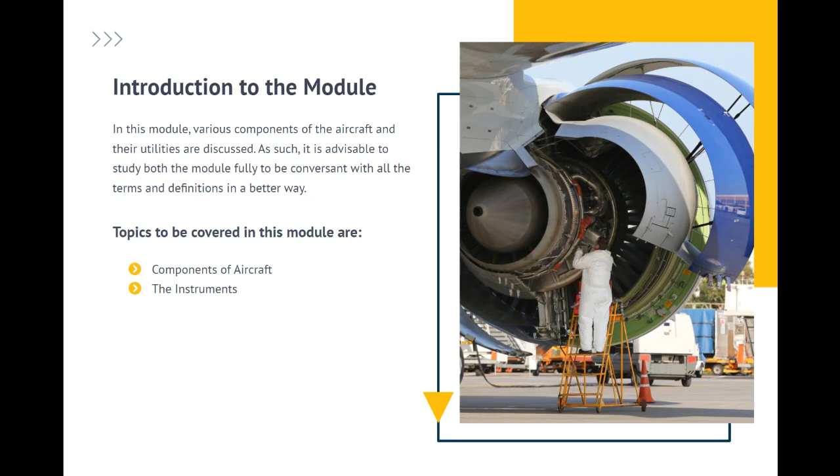Topics to be covered in this module are: components of aircraft, the instruments,

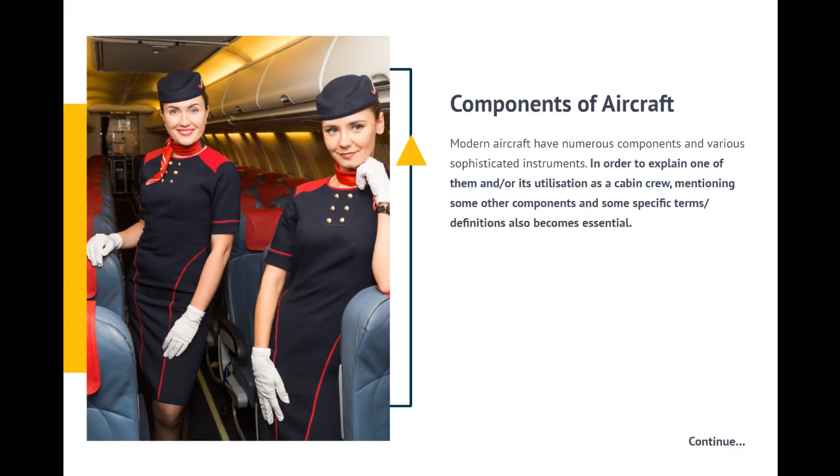Components of aircraft. Modern aircraft have numerous components and various sophisticated instruments. In order to explain one of them, and/or its utilization as a cabin crew, mentioning some other components and some specific terms or definitions also becomes essential. Some of the basic and important ones are cited and discussed below.

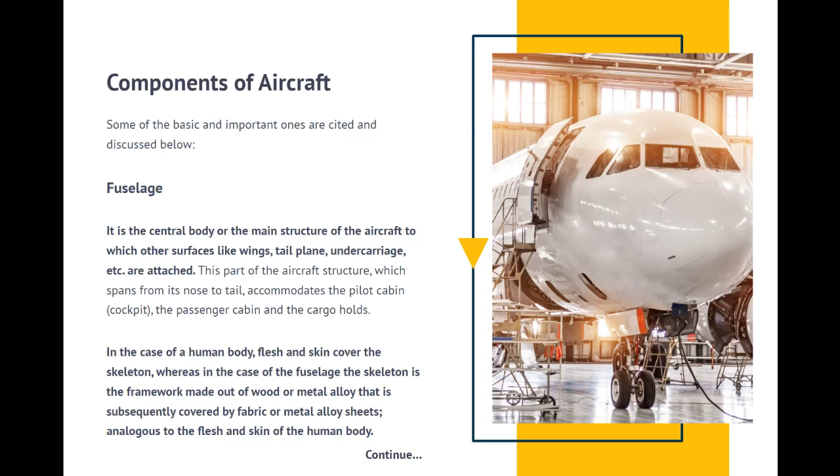In the case of a human body, flesh and skin cover the skeleton, whereas in the case of the fuselage, the skeleton is the framework made out of wood or metal alloy that is subsequently covered by fabric or metal alloy sheets, analogous to the flesh and skin of the human body.

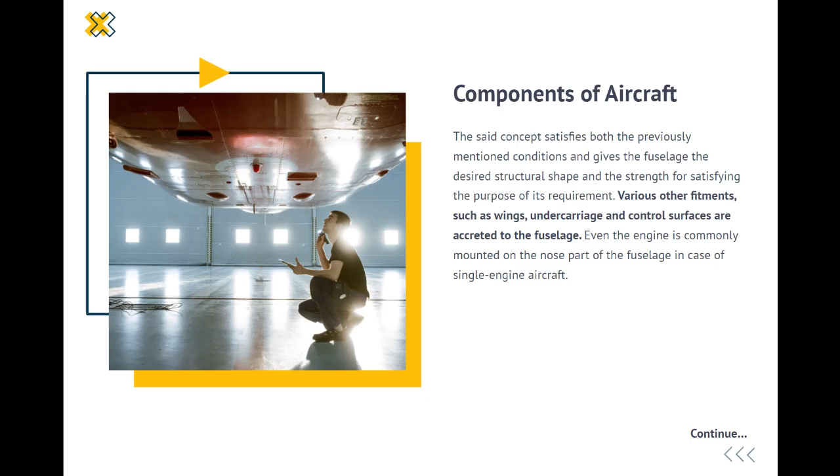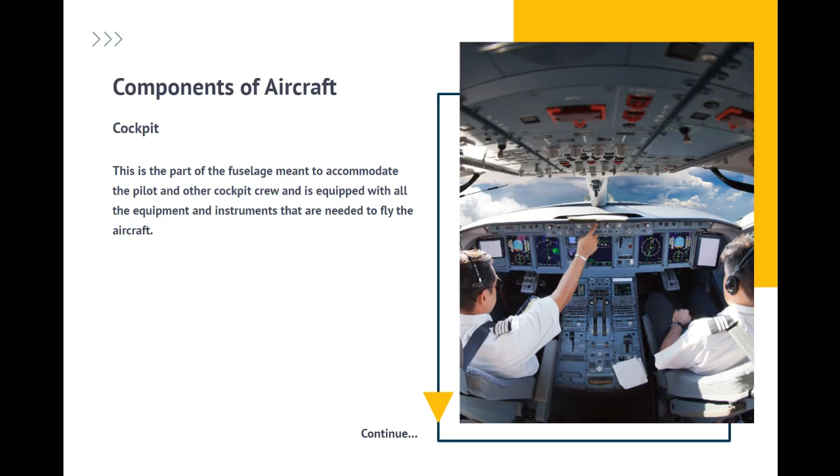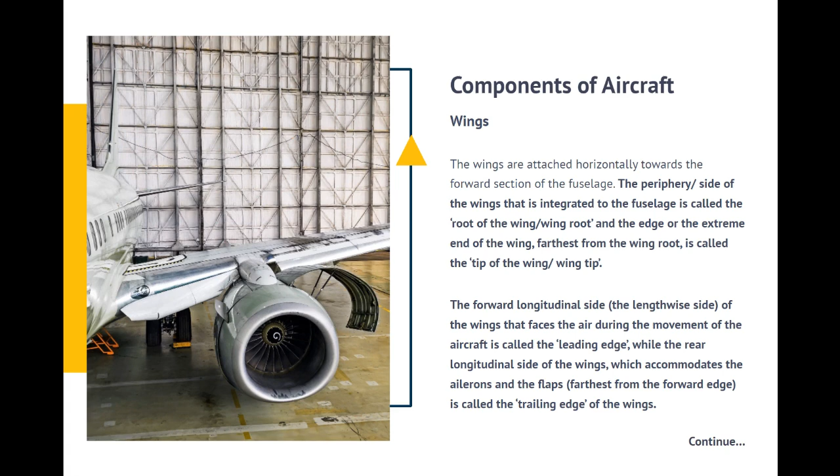The lateral, breadth-wise, cross-section or the profile of the wings has an aerofoil shape and possesses a typical aerodynamic quality. This quality enables the wings to acquire the necessary aerodynamic lift to support a heavier-than-air aircraft while moving through air, which makes the aircraft fly.

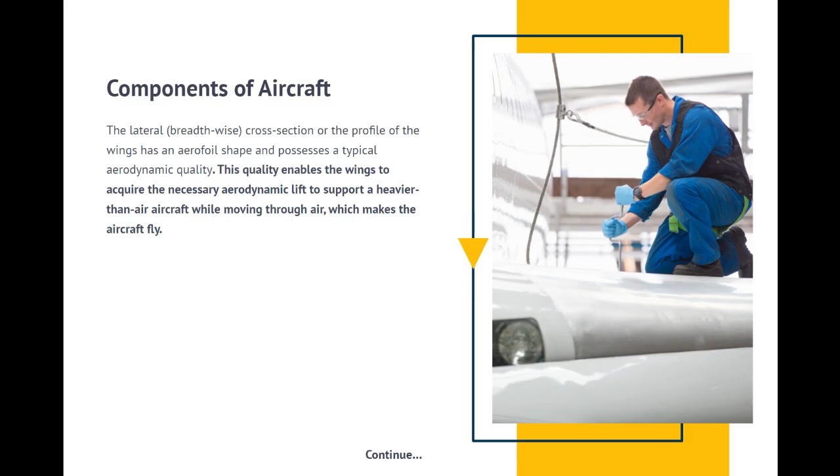The tail section, also known as empennage, is composed of 4 components, such as tailplane or horizontal stabilizer, elevators, fin or vertical stabilizer and rudder.

All these 4 segments of the tail section are again not solid metal pieces, but a framework covered with sheet job analogous to those of fuselage and wings as described earlier, and which follow their principle homogeneously.

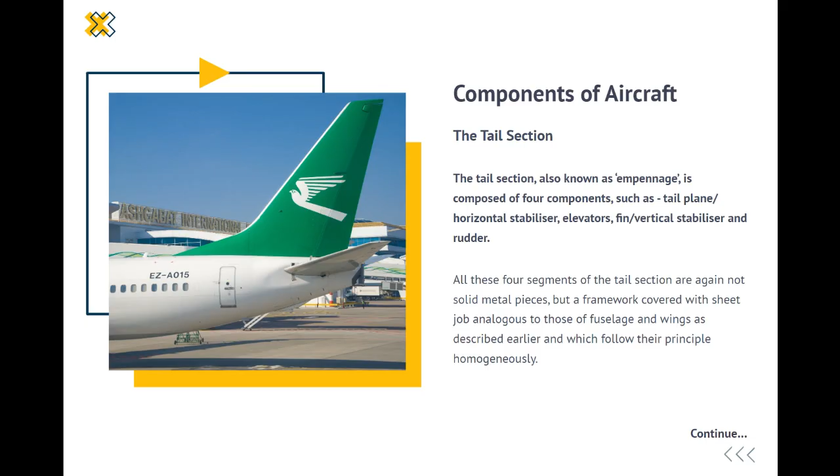Tailplane or horizontal stabilizer. The tailplane is an immovable airfoil structure of the tail section that is assembled almost horizontally on the fuselage as that of the wings, which provides stability in pitching.

Both the coupled elevators are attached equidistant from its middle to constitute the tailplane. The tailplane could be trimmed from the cockpit.

Fin or vertical stabilizer. This immovable component of the tail section is assembled perpendicularly, vertically, to the fuselage at the middle of the tailplane. The rudder is hinged to its trailing edge.

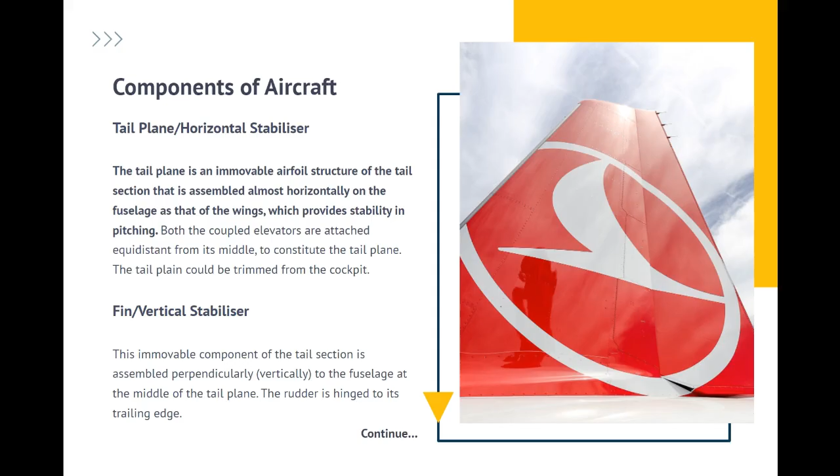Ailerons. The ailerons are one of the primary and wing-related flight control surfaces. These movable components are hinged at their own longitudinal forend and are attached to the trailing edge of each wing to complete the formation of the wings.

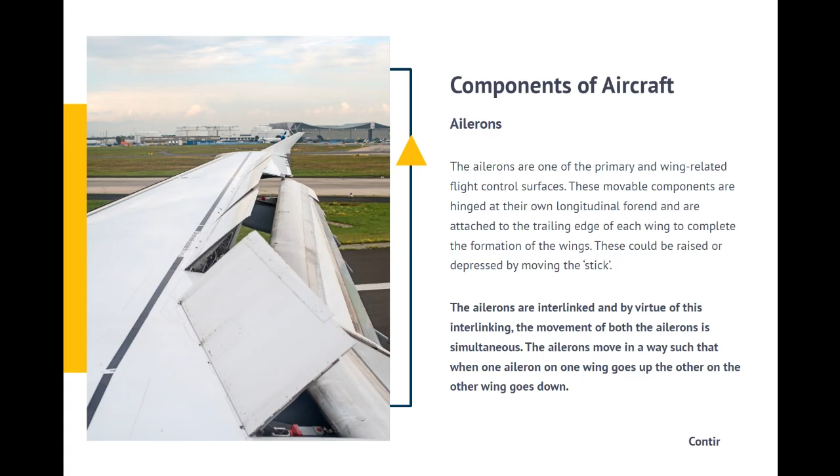These could be raised or depressed by moving the stick. The ailerons are interlinked, and by virtue of this interlinking, the movement of both the ailerons is simultaneous. The ailerons move in a way such that when one aileron on one wing goes up, the other on the other wing goes down.

Flaps. The flaps, attached to the trailing edge of the wings between the ailerons and the fuselage, are one of the auxiliary movable controls that form the wings.

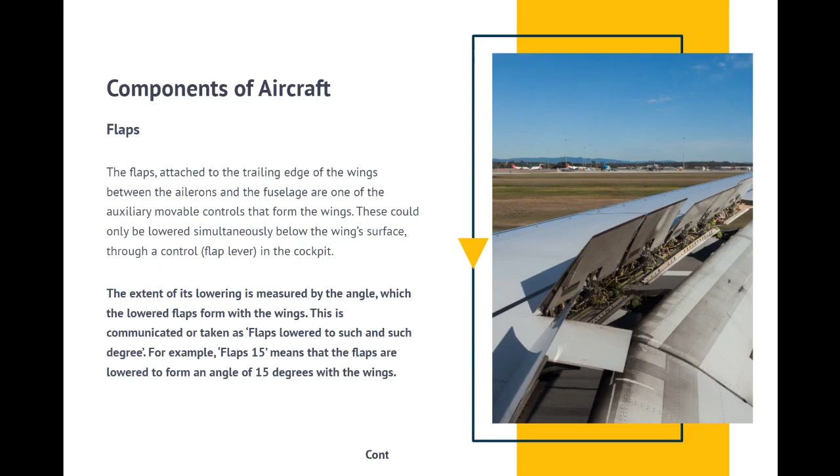These could only be lowered simultaneously below the wing's surface through a control flap lever in the cockpit. The extent of its lowering is measured by the angle which the lowered flaps form with the wings. This is communicated or taken as flaps lowered to such and such degree. For example, flaps 15 means that the flaps are lowered to form an angle of 15 degrees with the wings.

However, the flaps are put on through various settings to suit the various phases of landing and thereafter, such as during descent, approach to land, final landing approach, and after touchdown rolling, moving on the ground. Suitable lowering of the flaps evokes the drag and provides the advantage of approach for landing at a steeper inclination or gradient with a reduced velocity or speed.

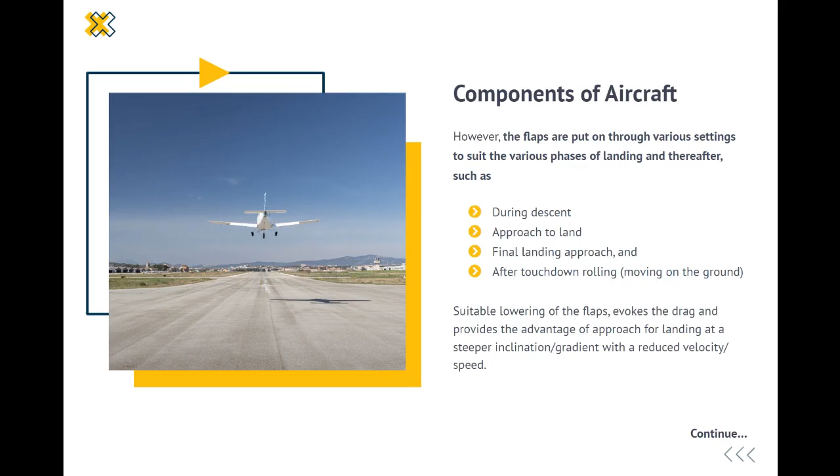Elevators. This primary and movable control surface produces the pitching movement of the aircraft on its lateral axis. The forward longitudinal edge of the elevators is hinged to the trailing edge of the tail plane and can be moved up and down by the forward-backward displacement of the stick from the cockpit.

The attachment of the elevators to the tail plane is exactly similar to that of the ailerons to the wings. However, the difference remains that in case of elevators, the movements are synchronized. That means both the elevators simultaneously either go up or go down.

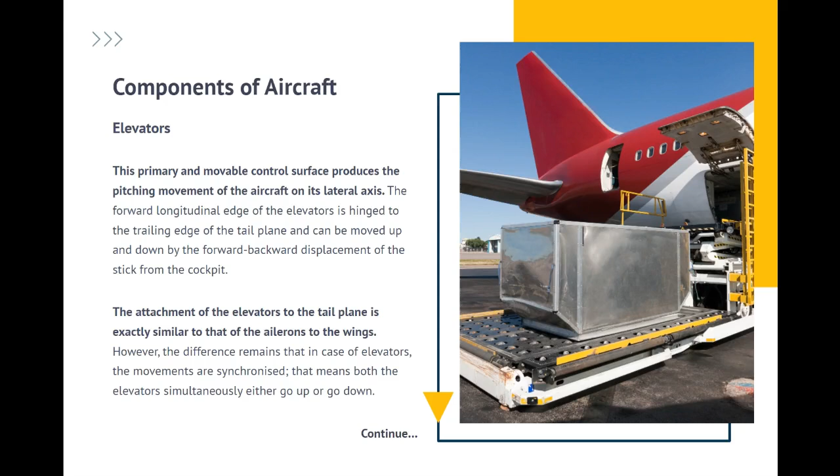Rudder. This is a primary, vertical, and movable control at the tail section, whose leading edge is hinged to the trailing edge of the fin, in a way analogous to that of the ailerons to the wings and elevators to the tail plane.

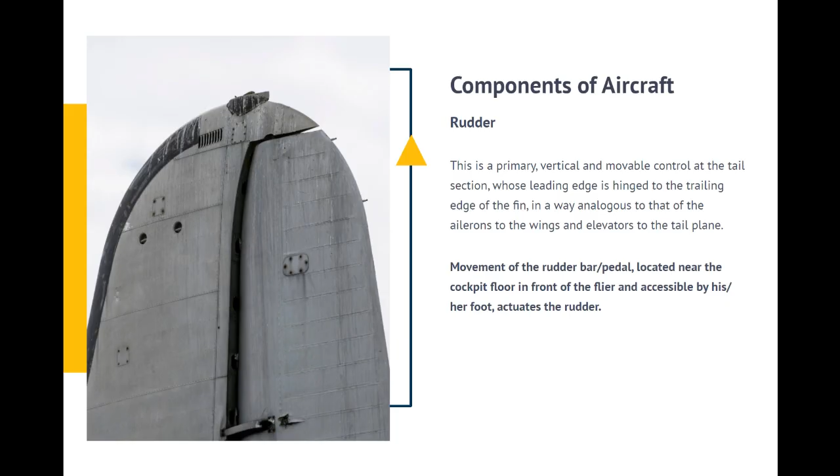Movement of the rudder bar or pedal, located near the cockpit floor in front of the flyer and accessible by his or her foot, actuates the rudder.